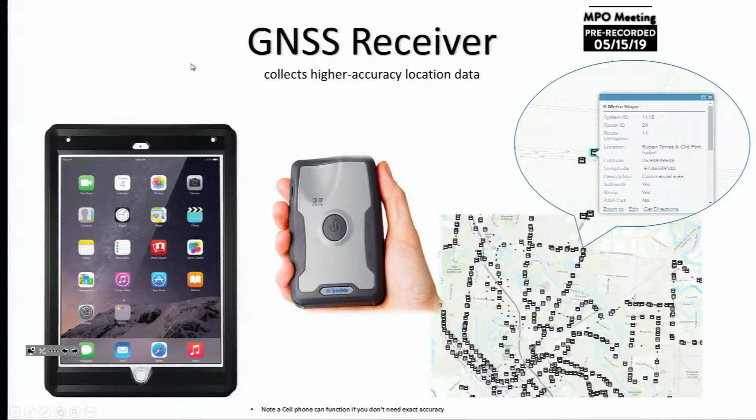I'm sorry, I didn't have a wireless mouse. Go ahead and click the first one. Okay, that's fine, go ahead and click that one. You can't see the whole picture here, however there is... there we go. There's the first screen. There's 588 bus stops that we went out and did inventory on. This is the complete Brownsville area of all our bus stops.

Go ahead and click the second one over. So as you can see, there's an individual bus stop. If I could move it—it doesn't move—there you go. It shows all the data of the information that we gathered. We checked for sidewalks and things like that, and did a thorough inventory on our bus stops. Each one, we took a picture at the location, and that picture is uploaded into the system. So that's an example of the picture that's uploaded. Can you go back to the presentation, please?

We sent all the gathered information to a company called Ride Systems. They took the information, uploaded it into a website, and created an application for Brownsville. With this system, anyone visiting the site will be able to track each one of our buses. Ride Systems has several functions which will bring a huge benefit to the community.

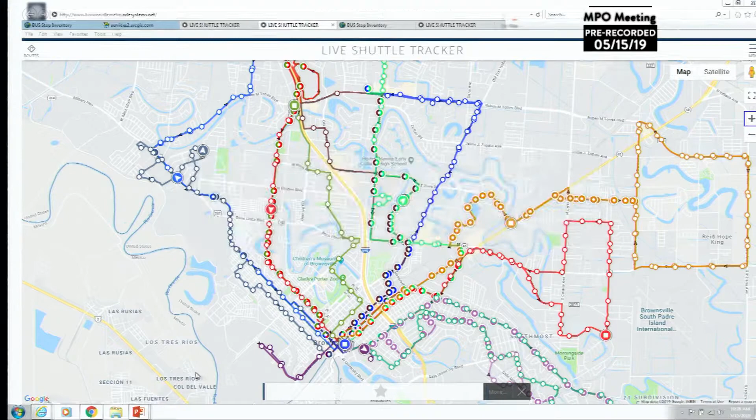Becoming an employee at Brownsville Metro, I continually look for ways to improve the system. About a year ago, we had the opportunity to get to know Ride Systems. We tested it out on our Metro Connect system. After we saw the benefits of the Metro Connect system, we realized that the community really needed this benefit. Due to the success of that, we went out and did what we could to receive the funding to implement this here in Brownsville.

I'm going to talk a little bit about our passengers. Last year, we had approximately 1.6 million passenger trips. Of those 1.6 million passenger trips, 1.4 million were on our fixed route system—that was the same system you saw a moment ago that we have done all the inventory on.

I would like to invite all of you to download the app and see what we've done here for the system. On June 3rd, we're going to have our press release, and we invite all of you to attend at La Plaza Terminal.

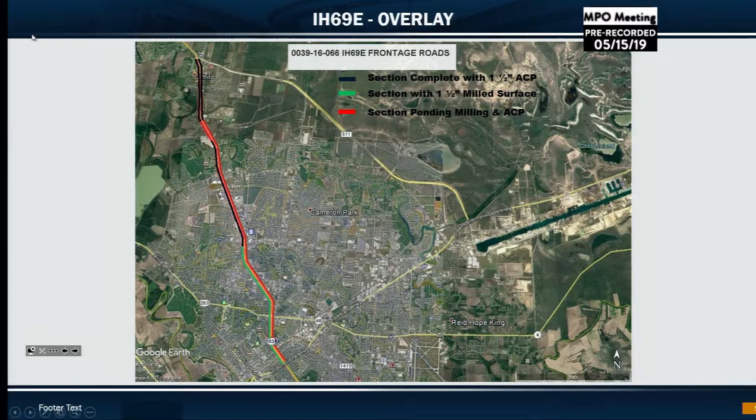What you see there in green is the areas being milled. The roadway is being milled 1.5 inches deep, and then it's being covered up with a new pavement section. You'll see in the next photos some of those operations and activities. What you see there is a little red section between the two black sections on the west side of the expressway. That's the section where the overpass for the hike and bike and the Frontage Road overpass construction project is taking place. That section is going to be omitted, but once we complete that project, it'll have a new, fresh overlay as well.

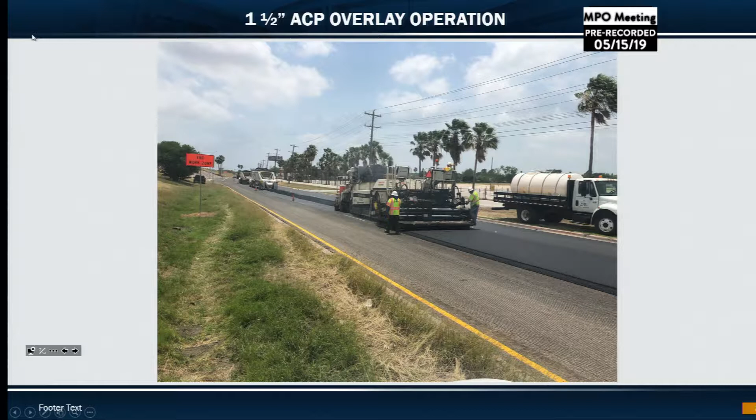Some of the activities I mentioned were taking place—the milling operations you see there, that's your milling machine with the transport vehicles hauling off the excess material being milled off the roadway. Currently, the milling operations have started from FM 802, working their way south. Everything north of that has been milled on the southbound lanes. The hot mix operations, as you see in this photo, are taking place right after that. What we're trying to do now is have a 2-day lead time between milling operations and overlay operations to limit the amount of exposure the roadway has after the milling operations.

We have increased our sweeping operations as well, and limited the amount of work that takes place between these two operations. Of course, keep in mind that weather plays a big impact in covering these areas up, so as long as the weather stays clear, we're able to move forward and limit the time the areas are exposed to traffic between the two operations. The hot mix operation currently is working on the center lane in front of Chick-fil-A, working their way south up to the off-ramp for FM 802, by the Volkswagen dealership. The plan is to cover all that area up to there by the end of today, tomorrow, and then keep going south after that.

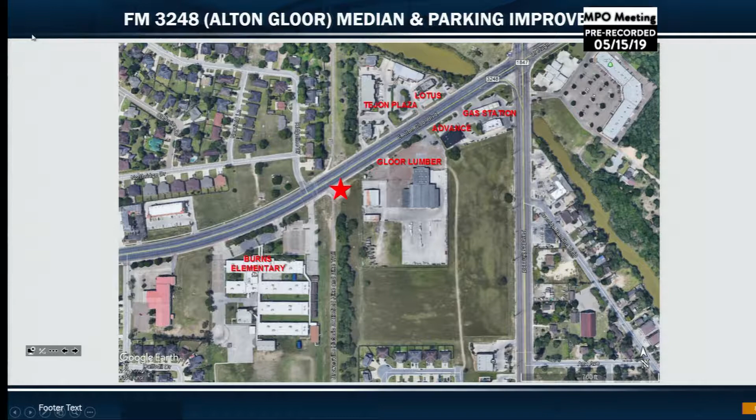Okay, I believe we have a question. Right there where the Pablo Kisel ramp is in front of Sunrise Mall, are y'all gonna have to rebuild the roadway a little bit, or are you gonna leave it where you can tell it's getting ready to fail?

On Frontage Road, right where you have the little divider so you can't go over, that road's sinking down. There are big potholes when it rains, big water holes. I did notice an area where the flex base, the substructure of the roadway, was exposed. Not sure if we're talking about the same location, but the contractor did lay a thin film of pavement to cover that area up. As we're moving along, any imperfections are being addressed accordingly.

What's the estimated completion date? Currently we're looking at about 2 to 3 more months. Right now the concentration is working southbound. Once we're completed with the southbound Frontage Road lanes, they'll turn around and work their way northbound. At the end, they'll concentrate on all the underpasses underneath all the expressways.

Just to clarify, one of the goals we have is to work in segments at a time, in other words, not tear up the entire thing. So typically a roadway segment is about 2 weeks, then we go to the next segment. This is a very long project. Many areas need to be addressed, so we try to break it up to minimize inconvenience to the traveling public.

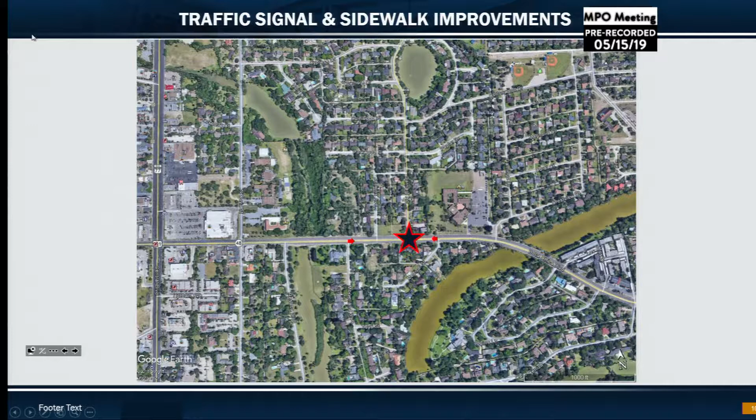The last project I have to present is the traffic signal and sidewalk improvement project. There are 2 contracts; this one in particular is on SH 48 at Bernard, between Medical and McLeland. You see the improvements to the sidewalk and to the traffic signal. There's already a traffic signal there, but we're updating it to the newest, most current standards. This is just a picture of the ongoing activities you'll see along that sector.

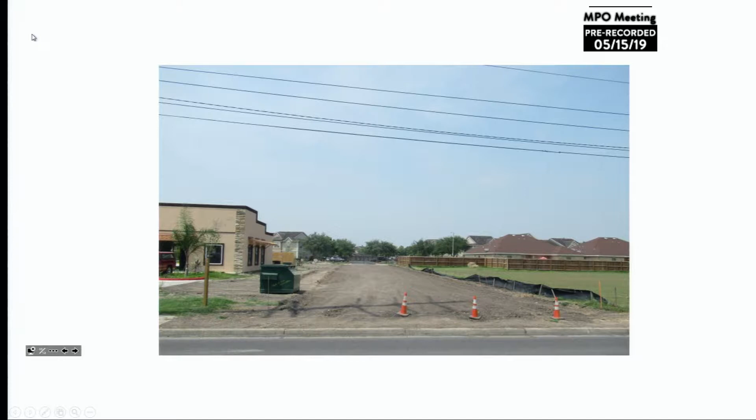Good morning. The first project I'm going to discuss is the El Mago Drive improvements. The limits are from Las Palmas Circle to Price Road. As you all know, this intersection of Price and Las Palmas, the exit there gets very congested, so this is going to provide an outlet for the residents and hopefully alleviate the traffic congestion at that intersection of Old Port Isabel and Price. Currently, they've cut the subgrade, stabilized it, and the next step would be putting in the base, which should be coming in the next few weeks, or probably this week they'll start that. They've already cut the grade.

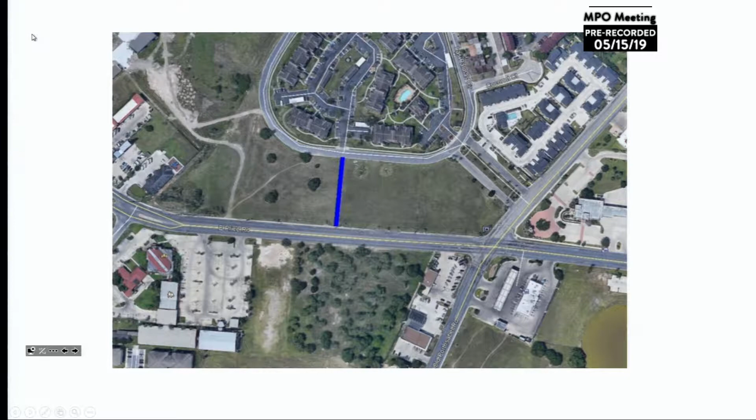Okay, now where is this? You know where Las Palmas Circle is, at the intersection of Price and Old Port Isabel Road? That development there, Las Palmas Circle, we're creating basically a cut. So that's across from the church, St. Luke's? Right, yes. Okay, alright. Do you have a date for completion? Yes, hopefully by the end of June we should be done with that.

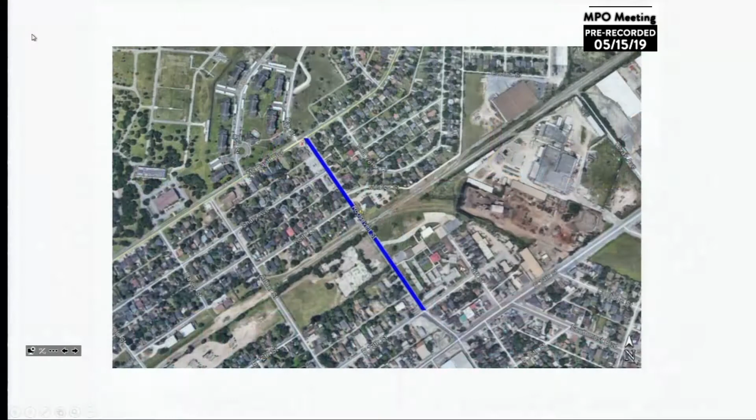The next project is Roosevelt Street. The limits are from McDavitt Boulevard to East 13th Street. When these pictures were taken, they were still working on the base work, the limestone base, but they've already completed that. They've actually already started placing concrete work, curb and gutter, and working on driveways, and they'll be starting sidewalks pretty soon as well. It's moving along quite nicely. This one should be finished by the end of June as well.

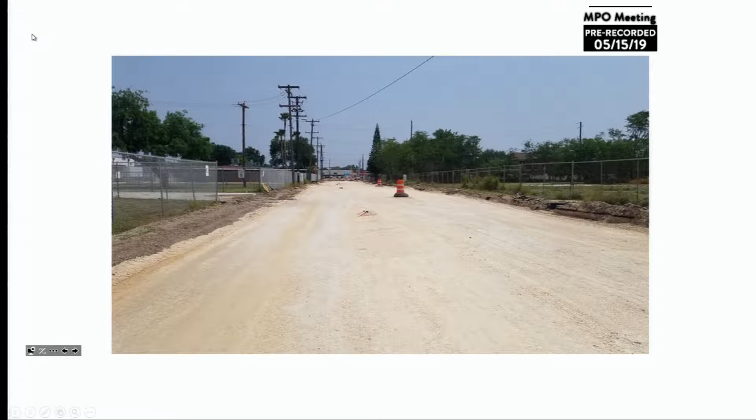Cameron County, no updates? Thank you. Cameron County RMA, Pete?

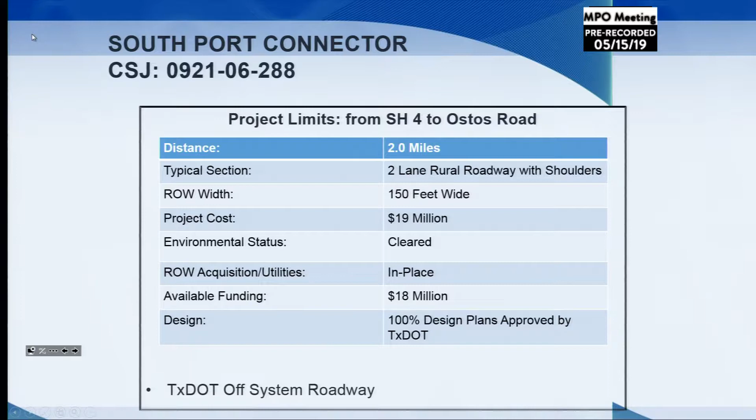First project we've got on the screen is the South Port Connector project. This project has been environmentally cleared by TxDOT. We're in the process of finalizing the design approval process from TxDOT, and so the next phase will be the bidding and construction phase. We believe the project is fully funded at this point, and we're currently working with the district staff and FHWA to begin that next phase.

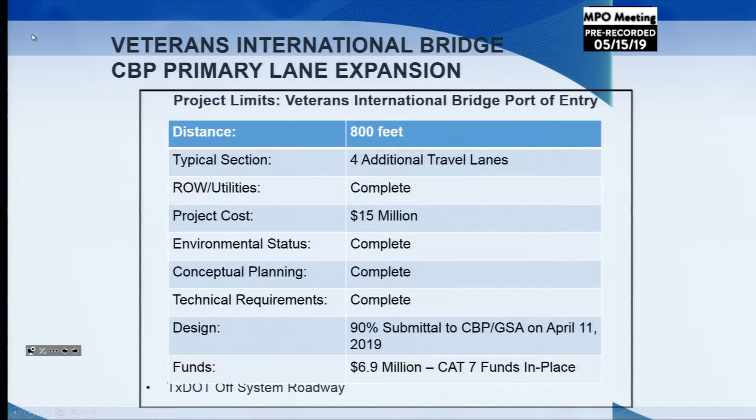The Veterans Bridge project, CBP Primary Lane Expansion Project, we submitted about a month ago the 90% design submittal to the federal agencies. We had a conference call earlier this week to go over all the comments that CBP and GSA provided to us. We're incorporating that into the 90% design submittal, and by the end of the month we should submit the final 100% plans to GSA and CBP for their approval.

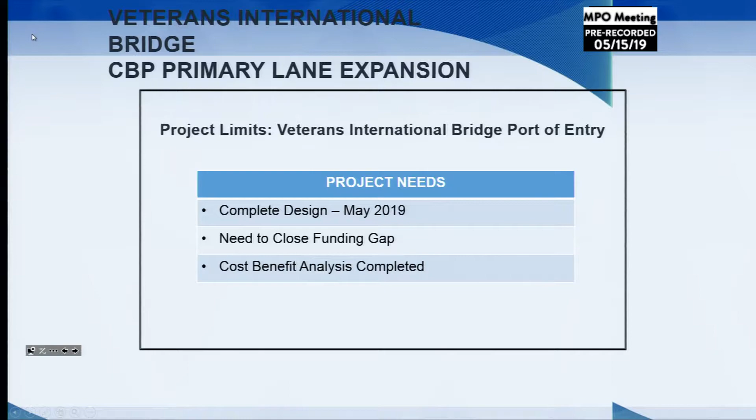We're working with the district staff and the MPO staff, not only on this project, but also on a couple of other projects, Old Alice project, Whipple Road, and the plan is to bring an item at the next policy committee meeting for the committee's recommendation on funding for the Old Alice project, from Highway 100 to Sports Park, and then Whipple Road in Los Fresnos.

The GAP 2 project, we're working with the district staff on getting the necessary AFAs for this project. The project is fully funded at this point, but we do need to amend the existing design to ensure that it meets interstate standards. This is the last gap between Olmito and the entrance to the Port of Brownsville. Once we get this completed, the entire route will meet interstate standards and will be able to be signed as Interstate 169.

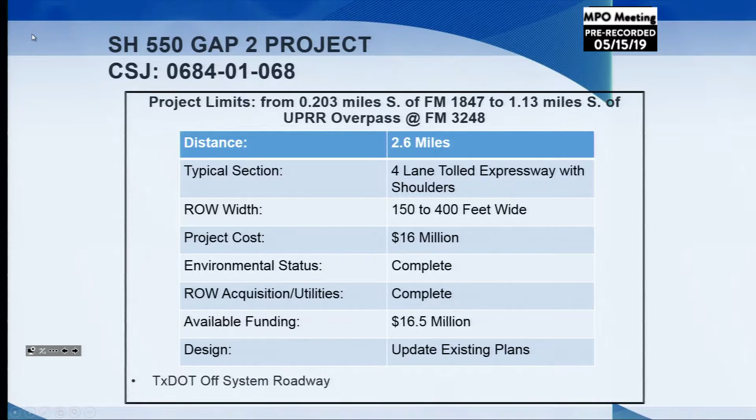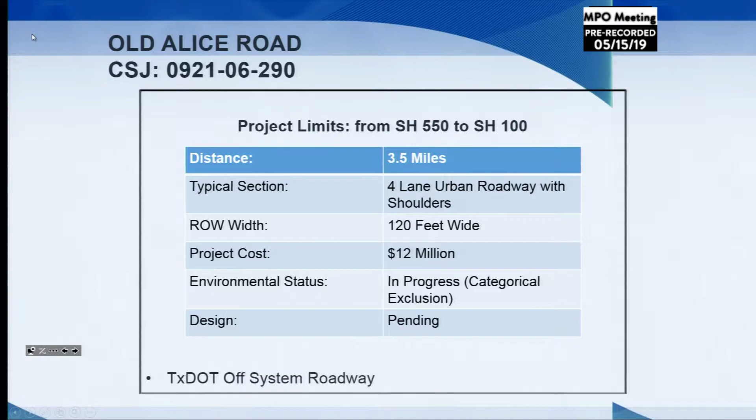Old Alice Road, this is a project where the RMA is doing the environmental work. We're working with the city and the county to try and get local funds to complete the engineering. As I mentioned earlier, we're working with the MPO staff on getting an agenda item next month to have the committee consider the funding that's necessary from Highway 100 to Sports Park.

We're working with TxDOT on the environmental documents. We have completed the noise analysis. We're working on the cultural resources, those being the archaeological survey and the historical analysis that is required for the environmental document.

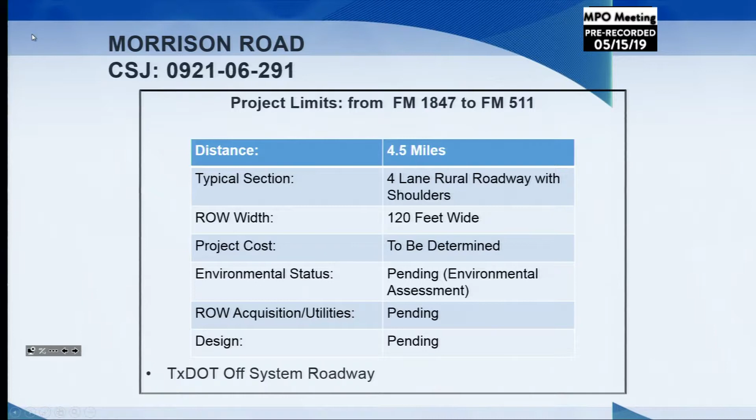Morrison Road, on this one we're working with the City of Brownsville on the advanced funding agreement with TxDOT. We have received the EDC reduction from TxDOT, so the local match required by the city will go down from 20% to about 5.8%. So it's a good savings for the City of Brownsville. Once we get those, we can proceed and work with TxDOT on the consultant selection process for the environmental document and the schematics.

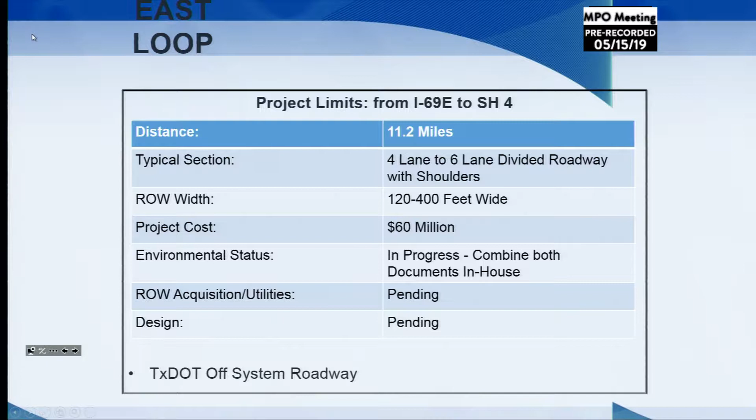East Loop, this one we're doing the environmental document in-house. We're using local money to do the necessary upgrades of the study. We're combining the two environmental documents into one. We've got a consultant that provided the traffic analysis, and a consultant that's doing the archaeological survey and the historical analysis as well. Those should be ready in the next 45 to 60 days. Once we get those, they'll be incorporated into the environmental document.

The schematics are about 60% now, but by the end of the month they should be at about 100%. Once we get those, we'll submit to TxDOT for their review. We're also working with the district staff on getting an advanced funding agreement for this project, and on the funding for the construction. We're currently developing this as an off-system project, but the discussion we've had with TxDOT is that in the next couple of months, hopefully we convert it from off-system to on-system. We'll continue to coordinate that with the district staff.

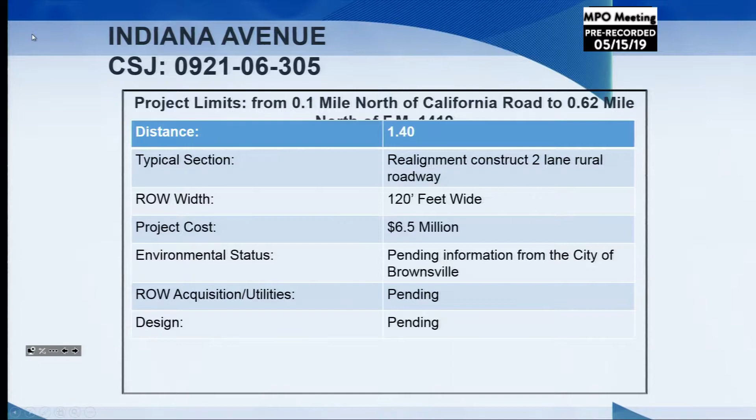Indiana Avenue, this is a project by the Brownsville Airport. I believe last week we just submitted the EDC application to TxDOT, again, to lower the local match from 20% to 5.8%. We do have funding through the MPO to do the environmental document. So once we get an advanced funding agreement and the EDC reduction approved, we'll work with TxDOT and go through the consultant selection process.

Whipple Road, we do have an advanced funding agreement fully executed, and we're working with TxDOT in going through the consultant selection process.

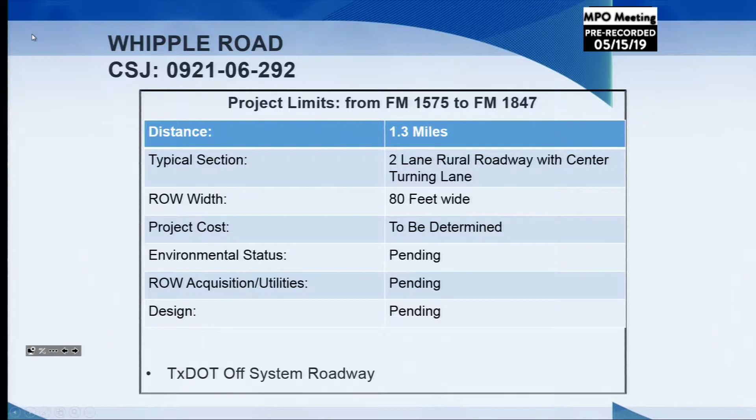This is in the Los Fresnos area, behind the Walmart. This will connect Paredes Line Road to 1575. We're staying within the existing right-of-way, going to a two-lane rural roadway with a continuous center turning lane. We're currently working with TxDOT on the consultant selection process.

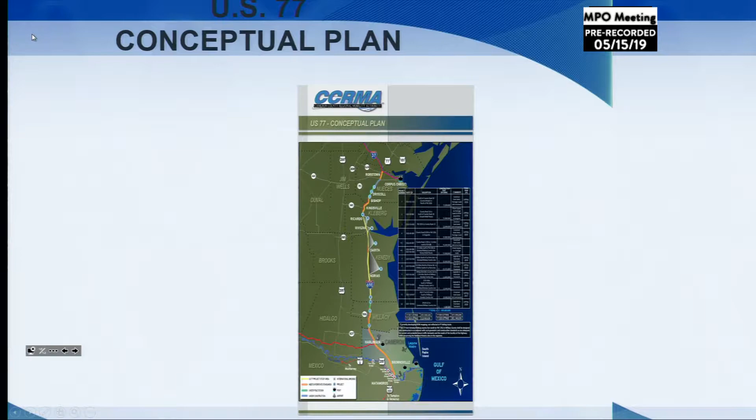Then the last slide is US 77. We continue to advocate for the funding. We've had discussions with the district engineer on the funding necessary to complete all the improvements between Brownsville and Corpus. Hopefully in the next couple of years, the projects can be fully funded, and we can sign the entire 125 miles as Interstate 69E.

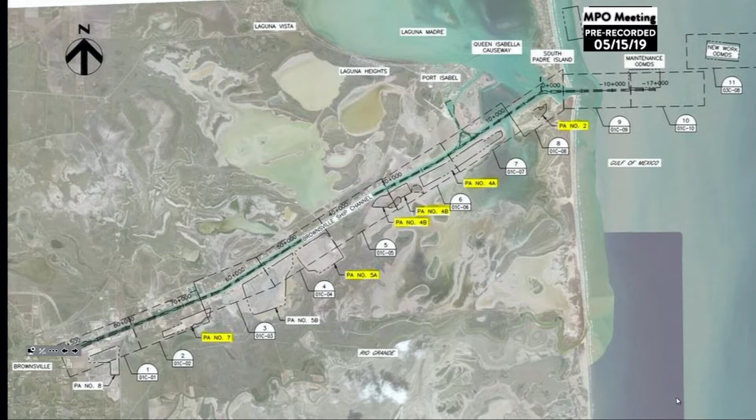So yes, we're deepening the channel from the old 42-foot authorized depth to 52 feet, which will also involve dock improvements on some of the docks that will benefit from the deeper draft. The new oil dock number 6, currently under construction, is located at a point prior to the end of the deepening, so it will receive direct benefit. We actually designed it for both 42 and 50 feet, and it was bid at 50, so it will take advantage of the deeper draft immediately.

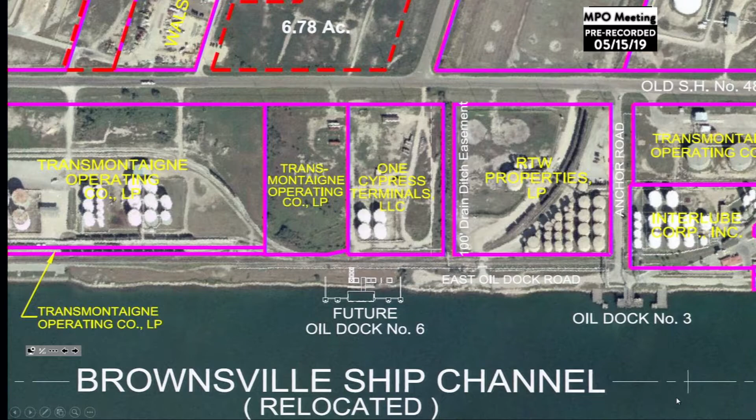But we've got several other docks in this same region that need to be upgraded to the deeper draft. This is now about a $28 million project, which also included upgrades to oil dock number 3, shown to the right, plus some maintenance dredging we did on 9 of our docks, including docks 3 and 5 and some of the cargo docks on the south side. That's the encompassing area of that project.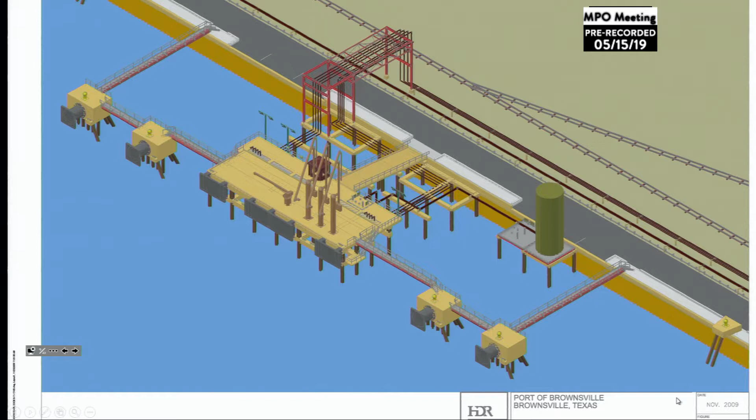They're doing the casting of the concrete. They've already finished the two structures to the left, and already cast some of the structures to the right. They have the forms working on setting everything up so that they can complete the concrete casting of that area.

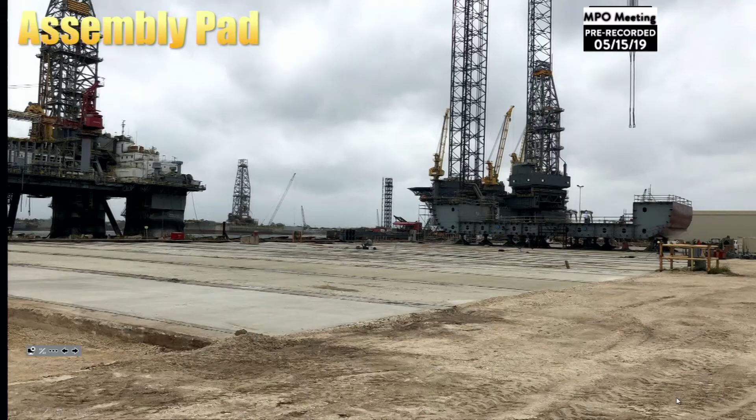Another project that we have is the Keppel AmFels Vessel Assembly and Erection Pad. This project will assist Keppel AmFels with the fabrication of vessels. They're working on some LNG vessels right now, and this is a new pad that we're pouring in the area of Keppel AmFels. This shows the location and some of the beam reinforcements we've had to do, along with some of the concrete being laid and floated.

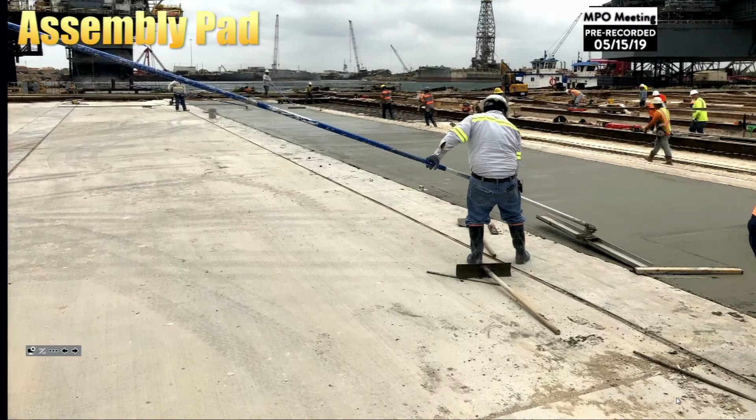Here you see some of the pad already completed. Even though the project right now is only about 40% complete, AmFels is already using the completed areas to start the fabrication of some of these large vessels. We anticipate completing this project in the next couple of months.

We are continuing to have progress meetings with the contractors to make sure they stay on track, testing the concrete and everything. This is now about a $5.2 million project, and we're doing it basically to assist in job creation here in the area.

Another project we have is the Southport Connector. The RMA already gave a report on that. Basically, all I wanted to show is that we've been working with them closely on the issue of the entrance here. We're trying to make sure we locate our guard shack or guardhouse in a place that won't interfere with the entrance and exit of the equipment we anticipate receiving here through SpaceX. So that's one of the primary things we're doing.

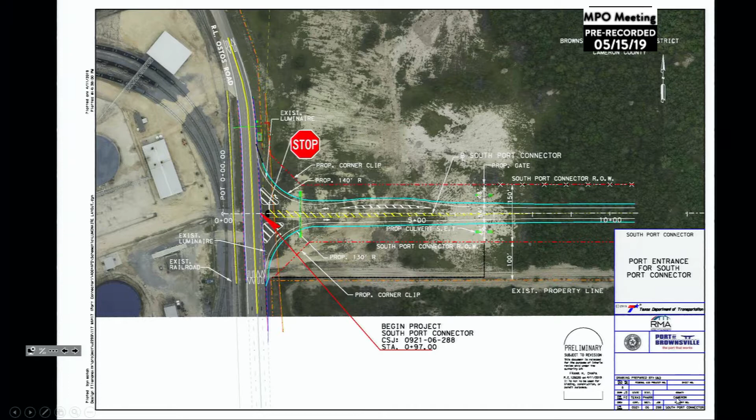This project is also about 100% plans, specifications, and estimate. We've got a couple of minor things we're working on with the consultant and the project manager in the Pharr district. He's been tied up this week, so we're working on everything to finalize with him, but we continue to be in contact with them and the RMA to finalize all the different issues.

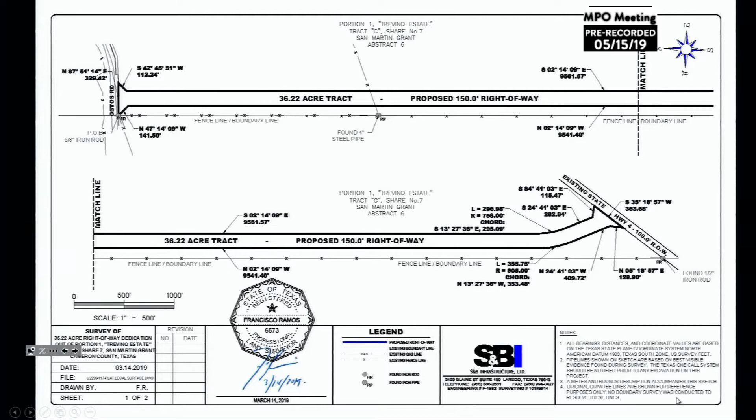One thing our board did at the last board meeting was designate the roadway as a public right-of-way, which was one of the requirements for the funding. So that's been dedicated and filed already, and we've sent the dedication document already to Pharr District.

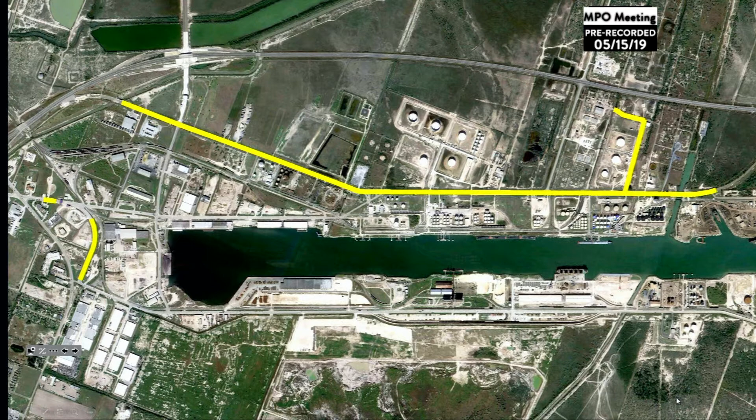I think this is the last project, the Port Road Improvements, Phase 2. This is a project done through TxDOT with partial funding. It's about a $2.2 million project, and about $868,000 is being funded by TxDOT.

In addition, there are some improvements we're doing at the intersection of 550 and 48, basically just adjusting the turning radii for the trucks because the angles were too sharp, so that adjustment is also part of this project. At this point, this project is almost complete. They've already finished Old 48, Callaway Drive, and Milo Road, and right now they're working on Foust Road, which is right by our main office.

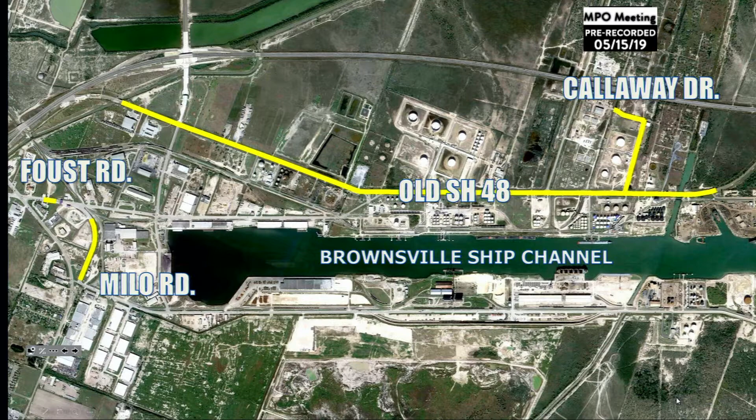They're going to take another 4 to 5 weeks to finish that, and at the same time they're working on the intersection under the 550. So within the next couple of months we'll be done with this project. This is about a $2.2 million project, and that's basically it. If you have any questions, please let me know.

Thank you. I had one question I want to go back to, and I think it goes back to TxDOT. Do we have a status update on the Boca Chica project, the median? I don't have a status update at this point, but we will make sure to have an update for the next meeting. Okay, thank you.

Okay, item 10, new business. I don't know if it's new or old, but could we get an update on the MPO merger?

I can take that, Eddie. Real quickly, as many of you have heard and seen in the various newspapers, April the 24th was a historic day for the Rio Grande Valley.

The three MPOs signed the redesignation agreement at the COG that Wednesday afternoon. The following day, April the 25th, the Valley delegation made a trip up to Austin. Commissioner Sofia Benavides, County Judge Trevino from Cameron County, and others from Hidalgo County assisted, along with Senator Hinojosa,